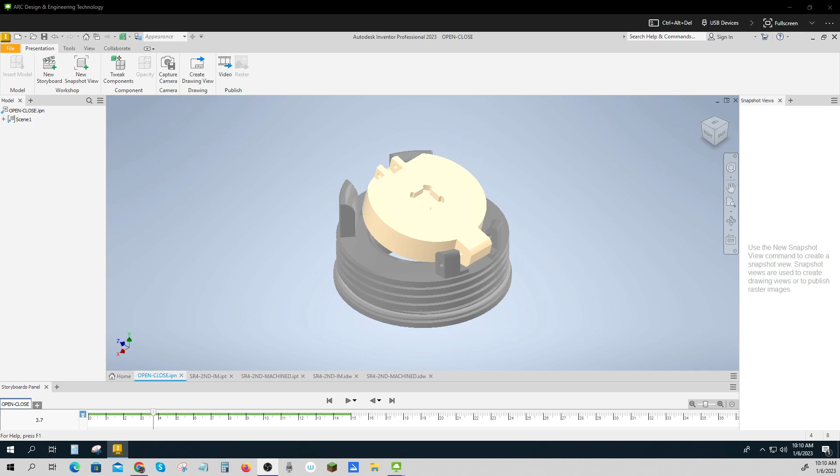Let's talk about the seat ring. That's this part of the check assembly. Remember, the check opens and closes, and the rubber part of the clapper comes and sits against this.

It turns out that this is a very critical part of the design. If it's too sharp, it cuts the rubber. If it's too wide, it doesn't seal well enough at low differential pressures with the spring. So this was very, very critical that we get this part right.

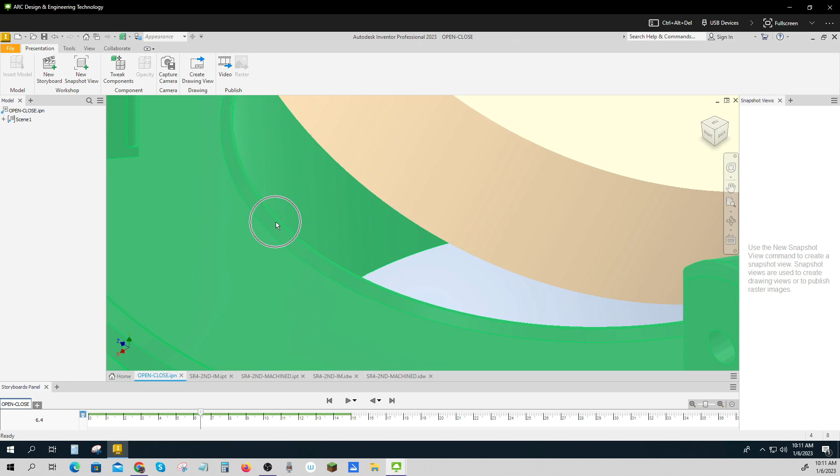So that's an important part of the design and how it relates to the height of the rubber, the EPDM, on the clapper.

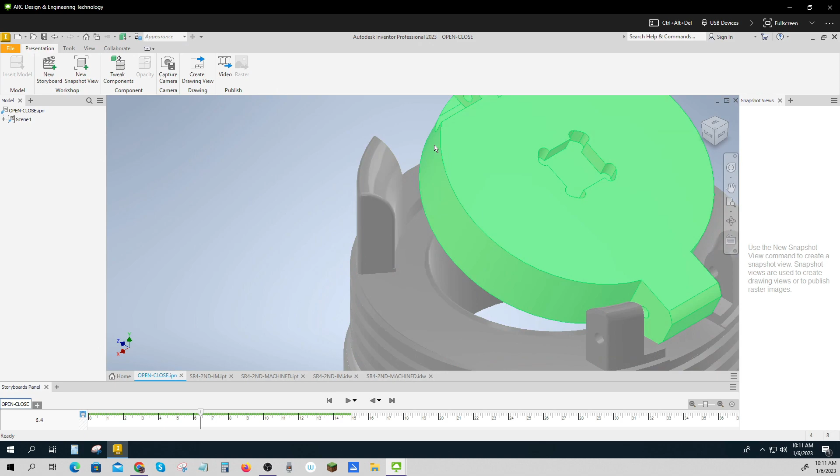So that's part of it, and it's got a special thread. You'll note when we get to that part, there's a special thread, and then there's these pockets that hold the spring and hold the clapper itself. And there's parts that you don't see. There's spacers and rods and shims and springs and cam bars and rollers and things like that.

But for the seat ring itself, what you're going to need to know is that the seat right here, that's an important area.

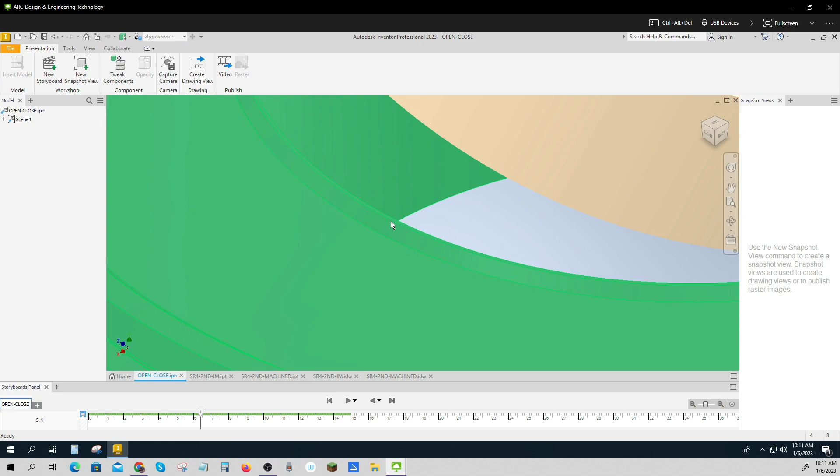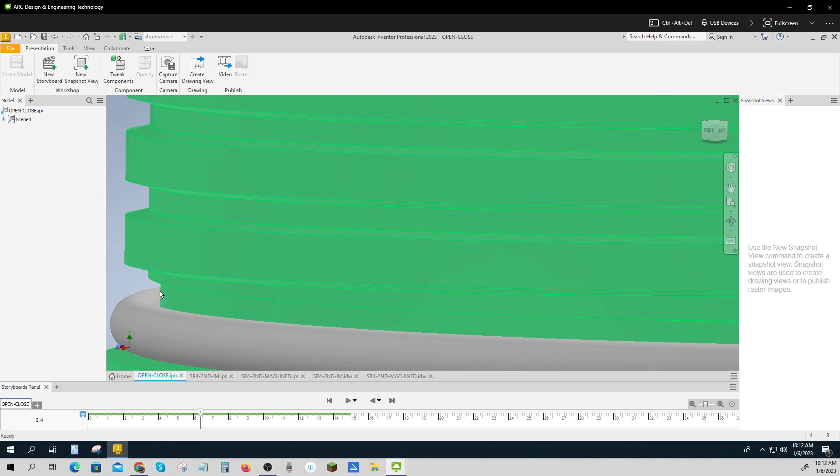The thread is important. Oh, and there's an O-ring, right? And so the O-ring has to sit. Let's see if I can get that to show a little bit better. The O-ring has to sit on this surface, and that's a modified O-ring groove.

Just because of the nature of this, it's modified just a little bit to fit slightly different, and that was due to the machining of the mating part and how that worked.

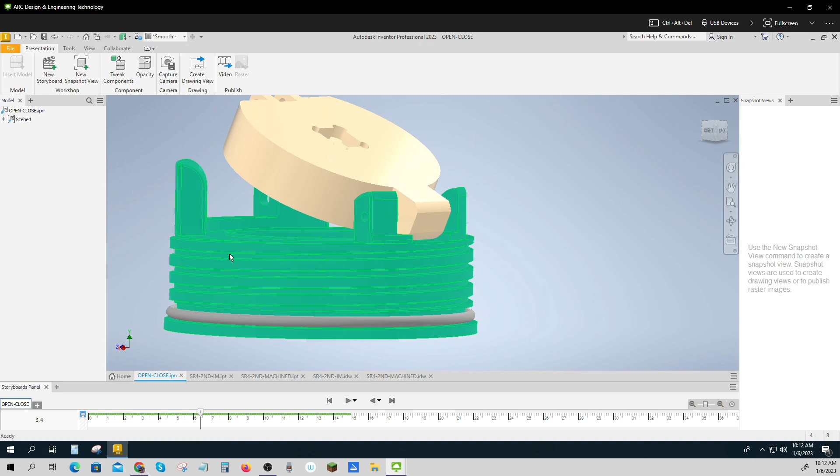Okay, and so again, we're going to make this from a blank. This is going to be an injection molded blank that then we're going to put on a machine tool and put all these fancy parts in it. And that's because all the tolerances are too close.

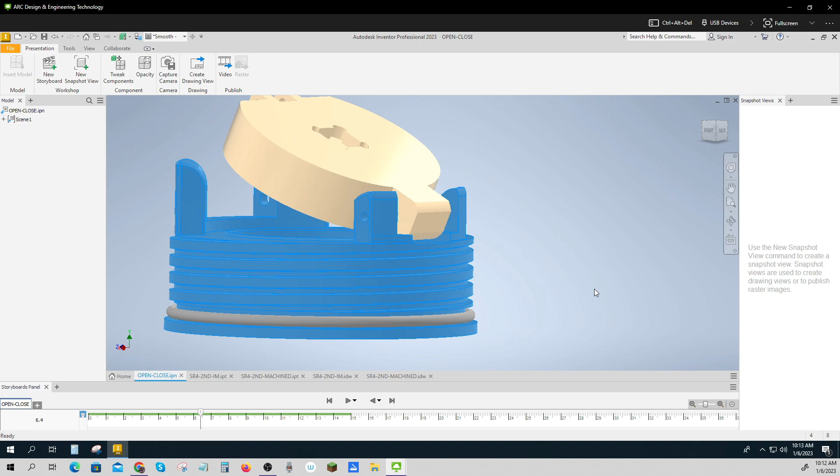Now, you should know that I've left a lot of features out that are just holes and lightening features. And that's because when you mold a part like this, injection mold it, where you have a large mass and then a small mass, these things end up getting what are called internal stresses, and they bend and they warp and they move all over the place.

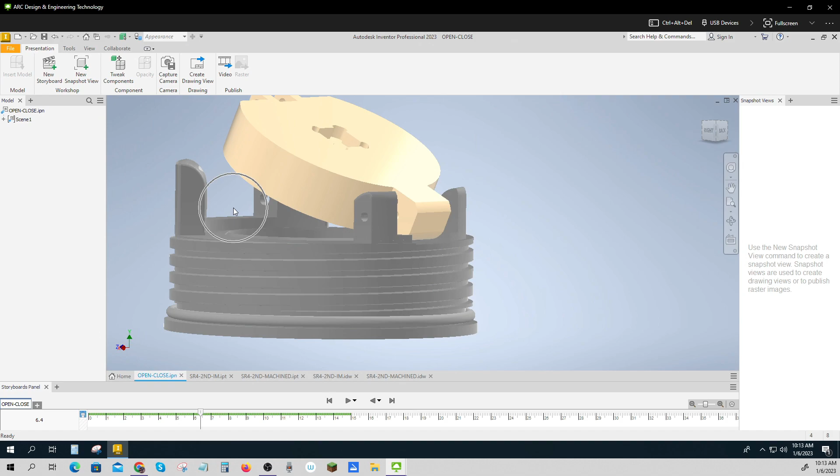So we've made it as a large mass that we then come back and machine to the proper dimensions. So let's take a look at that part. This is what the part looks like that we're going to get from our injection molding group. And you can see that there's extra material that we can then machine that fancy seat into.

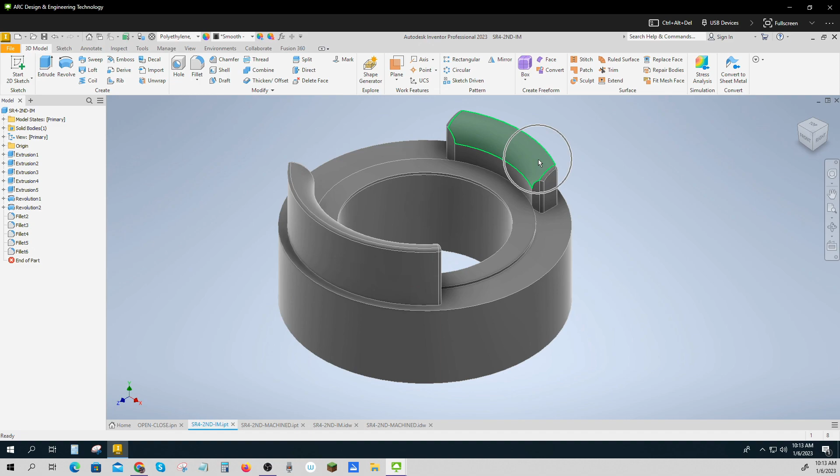There's extra material that we can machine a pocket into. Another pocket. And extra material that we can machine the O-ring groove and the thread.

Okay, so you'll want to make an injection molding drawing for this, like this, and we'll come back and talk about it later. It's not too complex of a drawing.

But then what you're going to want to do is take this and make a copy and create this from it. And you can see it's just adding some extrusions.

Let's see, there's an extrusion that we added. There's another extrusion that was added. There's another extrusion. So it's just taking material away from those.

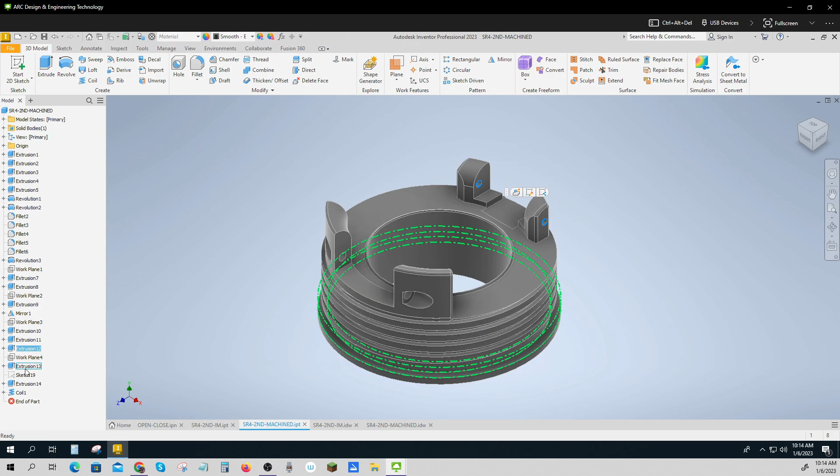And you'll get a video on how to do that. And so then there's the extrusion for the O-ring groove, the extrusion for the major diameter of the threads, and there's the coil itself.

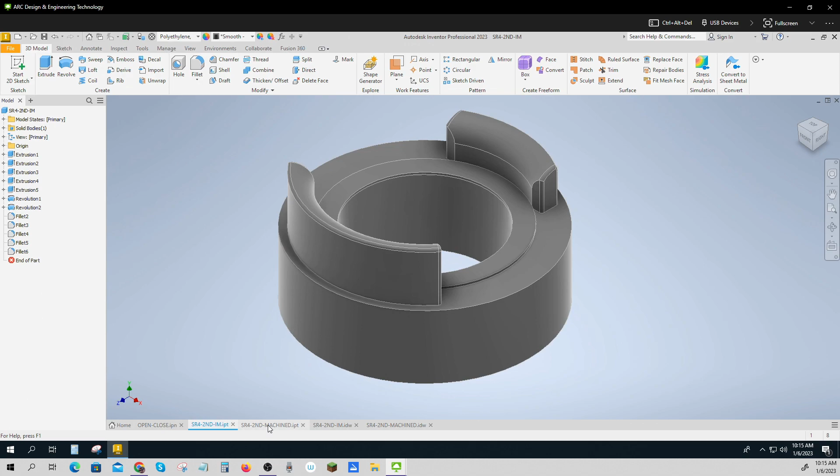We'll go over all of those in lab of how to do those. So you're going to start with a blank and then machine it to the close dimensions that are needed.

So let's take a look at the drawings again. As with every mechanical drawing, there's your main workspace. There are revision notes. There is a title block.

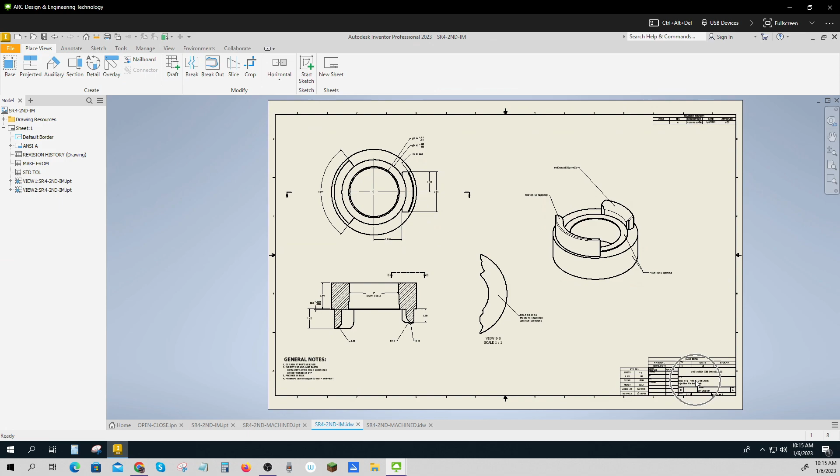On the title block, you'll see the title, the company, the drawing number, and how many sheets there are. Since this is D size, we got everything to fit on one sheet. This is the primary scale, so if a view doesn't list its own scale, this is the scale you're going to see.

In the title in general, I give the long description of the part and what part of the process this drawing is for. So this is the seat ring for a 4-inch valve. It's the second check assembly, and this is the injection molded blank.

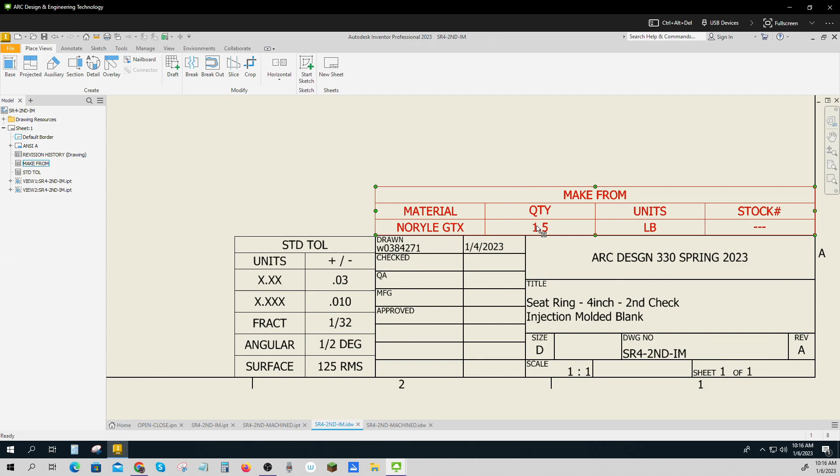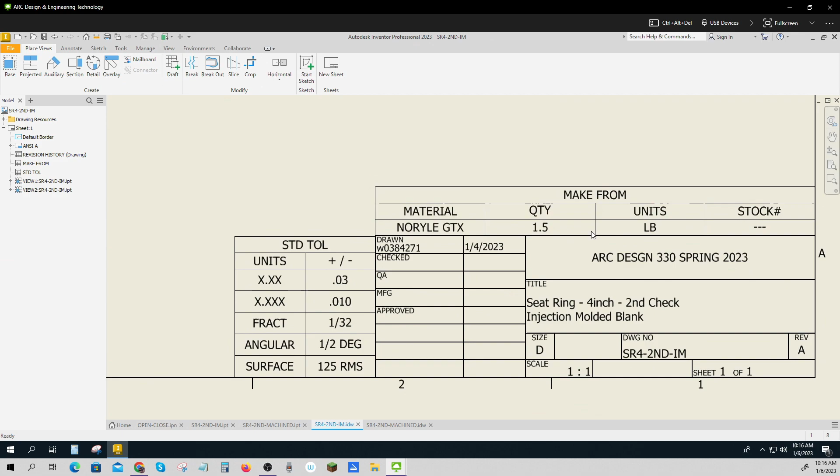Then we've got the 'make from' - this is something called Noryl GTX, which we talked about with the clapper. It's an automotive plastic, I think it's called phenylene. It's very strong, very stable, and we use 1.5 pounds of it in that blank. There's no stock number for that because we don't stock it - our vendor, the people making it and the people we order from, will stock it for us. We just want to let them know what to expect.

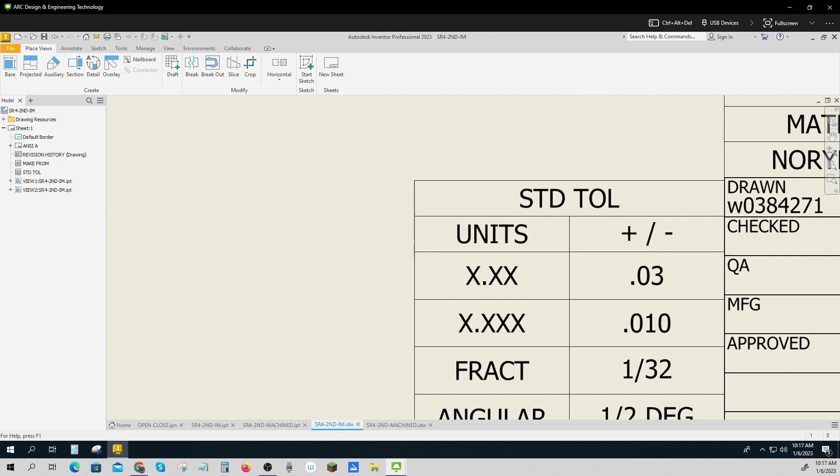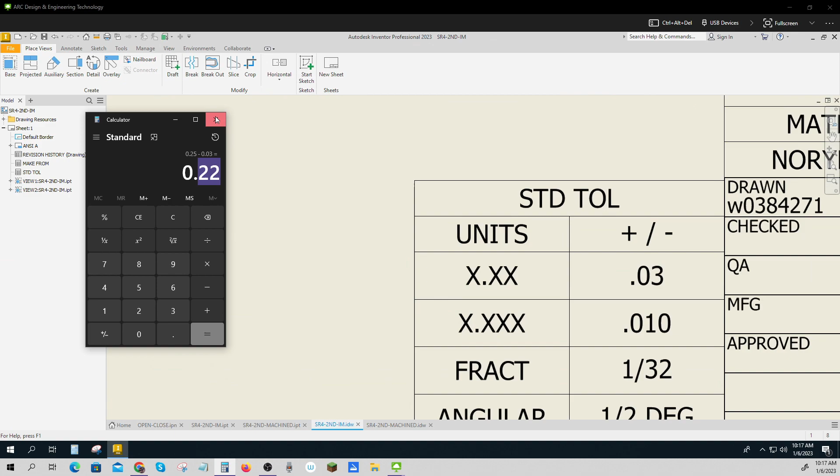Here's our standard tolerances. Remember, if a dimension doesn't have a tolerance listed on it - like this radius of 0.25 - we have to go back and note it's held to 2 decimal places, so that's going to be 0.25 plus 0.03, or 0.25 minus 0.03. Anywhere between 0.22 and 0.28, when I go about measuring that, will be acceptable.

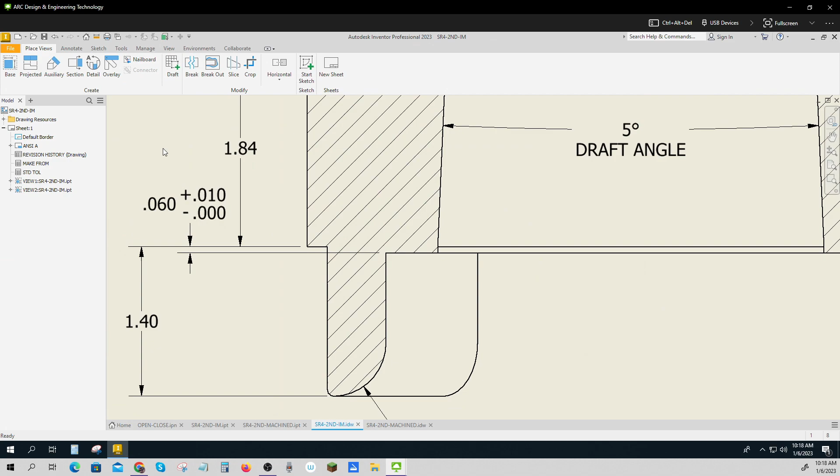So all of these, most of these, since it's a blank, have large tolerances, except for this one, which is 0.06 plus 0.01 or minus 0.000. That's off of the original drawing, and I'm not really too sure why that's being held so closely. Even though this was my part, I inherited a lot of this drawing, and I really don't think it needs to be that tight.

This is called the draft angle. That's so that they can pull this off of the core easily. It's also good for the water flow.

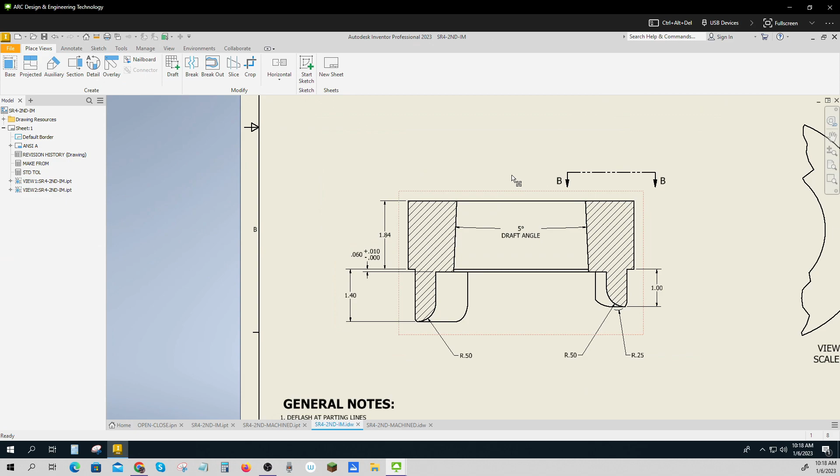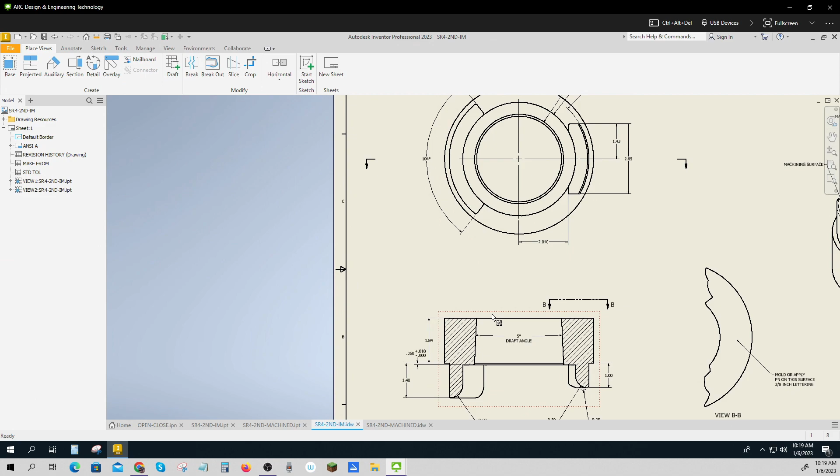So that's what we see, and this is a section view. Remember, when this was put in, this was my base view, and then I made a section view and put it down here. The reason the section view doesn't have letters on it is because it's an orthographic view adjacent to the primary view, so you don't need letters on this - it's an understood view per ANSI standards.

Now this one does need a view because I don't see where it is - that's just to show a little piece of this bottom so that we can apply a note, putting the lettering right there.

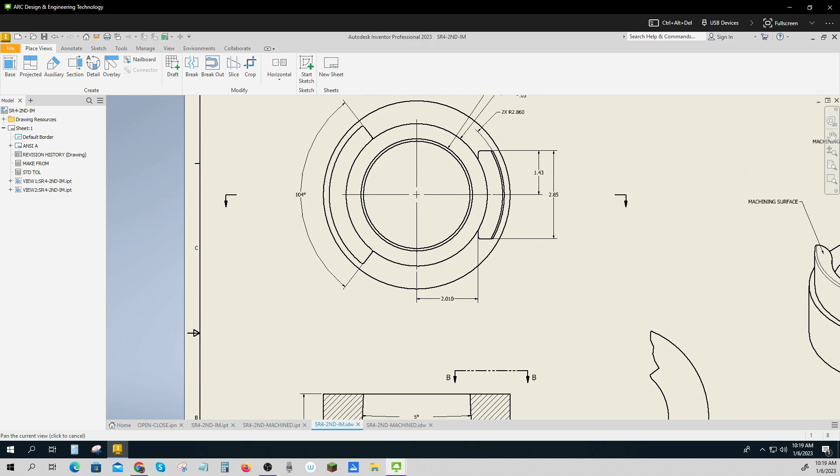Now some of the rest of this, again, I really don't think needs to be 3 decimal places, but it's listed that way on the original drawing, so I put it on there. Notice these ones are not that way - they're much, much larger.

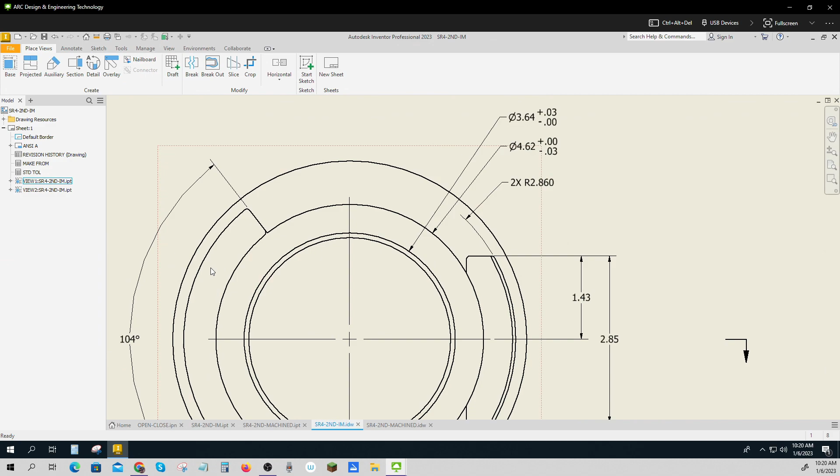Now these dimensions can be held with injection molding. If these ones get too big, they won't fit, so these can be inside a little bit by 0.03, and this one can be outside a little bit by 0.03. So that's the basis of this.

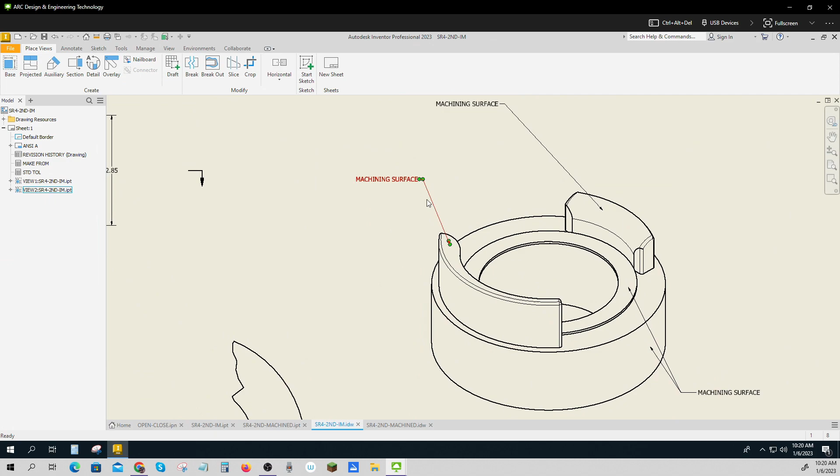Now you'll notice that you get this model - I've got this model for you - and you just have to figure out how to dimension it kind of like this. I put in a view so that we can make it clear which are going to be machine surfaces for the mold designer. So that's the basics of this.

And then deflash at parting lines - injection molds always come in two pieces, then the mold pulls apart and you can get your part out. That always leaves a little bit of flash, a little rim, so this tells them they have to actually go about and deflash it before they give it to us. There are lots of ways to do that.

We leave that up to the vendor to do. We also give them an inspection priority for the first and last parts of any one run. And the dimensions apply after mold shrinkage - this is hot plastic when it goes in, and as it cools, it gets smaller.

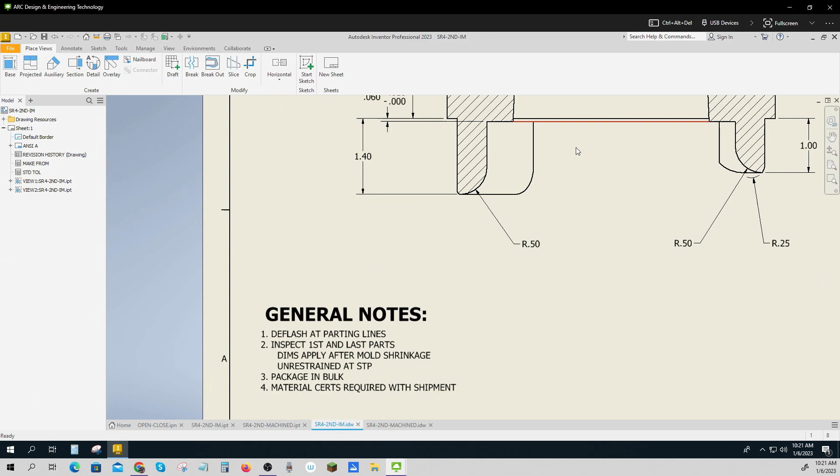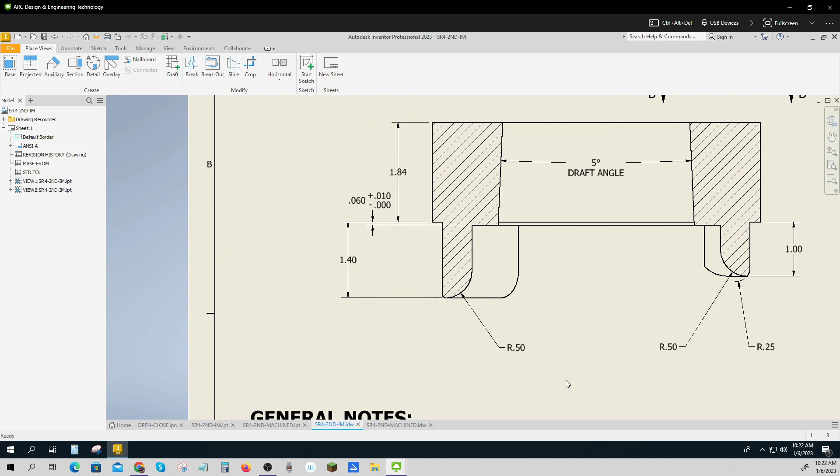We want to make sure the vendor knows these are not the mold dimensions. These are the dimensions of the part after it has shrunk and unrestrained. They don't get to clamp it down flat or anything like that.

STP is standard temperature and pressure, and that's an inspection term. I don't remember exactly what it is - I think it's 68 degrees Fahrenheit at, I don't know, 1 atmosphere pressure, something like that. I don't really remember all those details. I let the inspectors remember it.

They'll take two parts, the first and the last part of a run, into the inspection shop and let it sit for a day or 4 or 5 hours to come to temperature and pressure, and then they'll inspect the parts. We get to package it in bulk - they don't have to package them separately.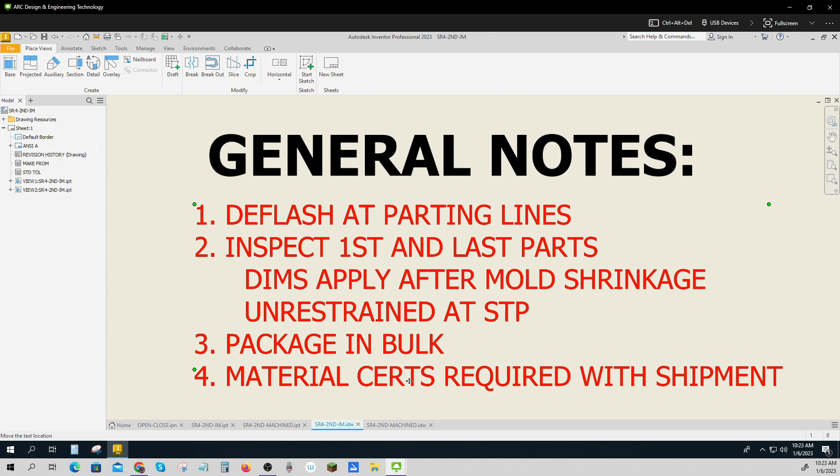And then material certifications are required. So the certification that this was made out of Noryl GTX injection mold plastic would be required to come with the parts.

Okay, so there we go. That's our review of the blank, or the injection mold part.

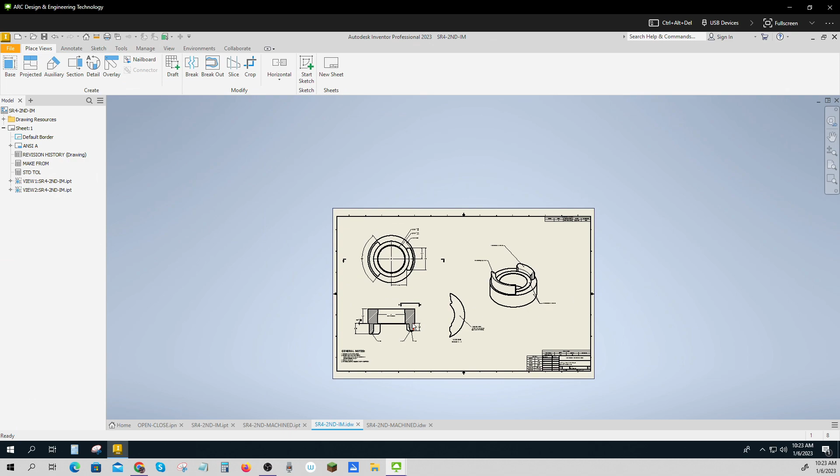Let's take a look at the machine part. Now this is a fairly complex drawing because lots of stuff is happening all over the place. Here are my two primary views. I'm not dimensioning much on these, but these just let me know where things are and about how big it is. Now, this dimension here comes from the molded part.

So it's in the reference brackets, the reference parentheses. But then I need to make the diameter for the O-ring, and this is what it is. Normally O-rings have different tolerances on it, so that's why this is modified. But this is what works in this part, and that is the O-ring groove dimension.

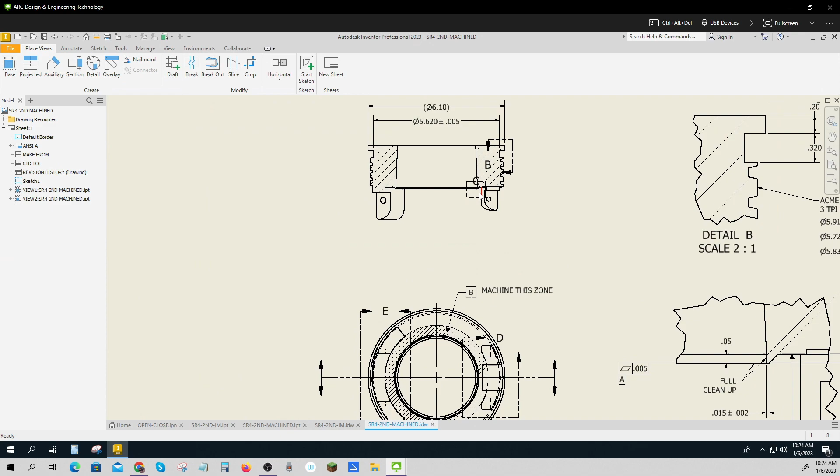This detail says, okay, I'm going to tell you about all this stuff in detail B. I'm going to tell you about all of this stuff over here in detail C, because this is just too small - I can't get everything in there. I'm going to machine this zone, okay, I'm going to machine that entire zone, and detail D is where I'm going to find out about that.

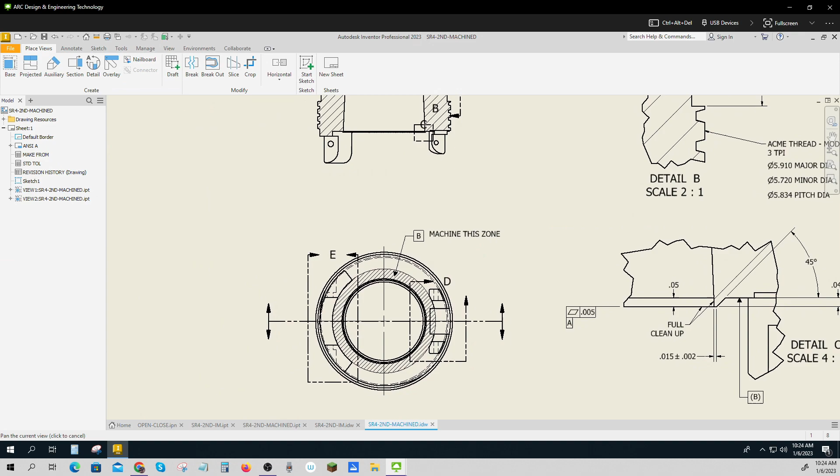So let's look at my detail D. Here it is - this is my detail D that tells me about this pocket that I'm machining. And then I had to make an alternate view over here. As I look at it, I prefer not to show the entire line. Okay, and so here it is. This tells me the top view, this tells me the other view.

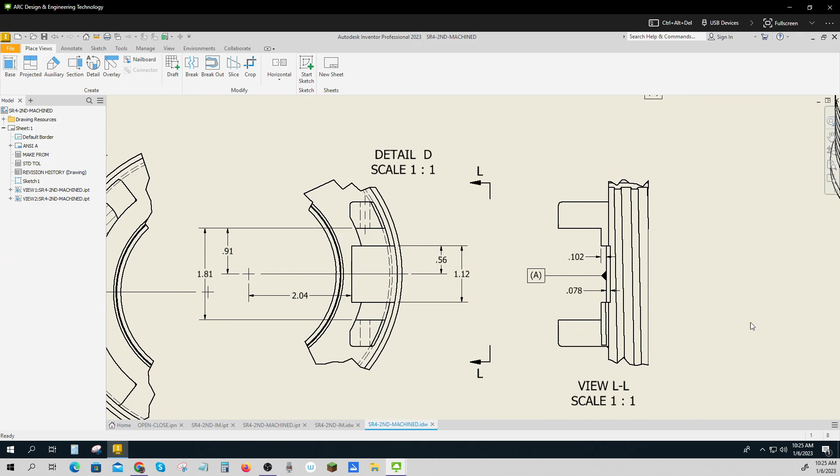I'll talk about the datums in a little bit. Okay, but what happens - well, I'll talk about it now. What happens is everything is relative to this seat. That's the key important part, which I told you about.

And so after that's machined, what's called full cleanup - they're going to do a full cleanup and then they're going to machine it down 0.048 inches at a 45-degree angle. And this surface, after it's been cleaned up, now becomes A. It's flat within 5 thousandths of an inch. Quite frankly, you can hold that much closer with a mill - you could easily hold 1 or 2 thousandths of an inch flat. So that becomes my key important point.

And then this becomes my next important point, so that dimension there. I'm not too concerned about the dimension itself - it can be plus or minus 10 thousandths of an inch, but I need it to be parallel to this. I need it to be parallel within 5 thousandths of an inch, okay, otherwise it doesn't seal properly. And I can get too much of a cut when this goes on and off and on and off.

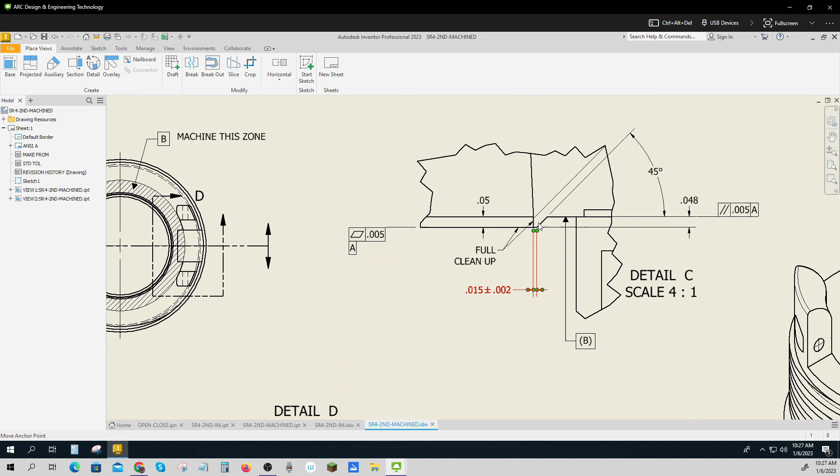Okay, and it's got to be parallel to A. And then I just want a nice clean bore right here that's straight, and you'll machine that also. So that tells you a lot, right? This one is really important. And then we've got the same thing on the other side.

It's the same thing on the other side where I've got, and I'm not going to show my entire line. So here again, I've got a cutout, which I show right here. There's my cutout, and the cutout goes to 0.172 above the seat. So it's just a rectangular cutout.

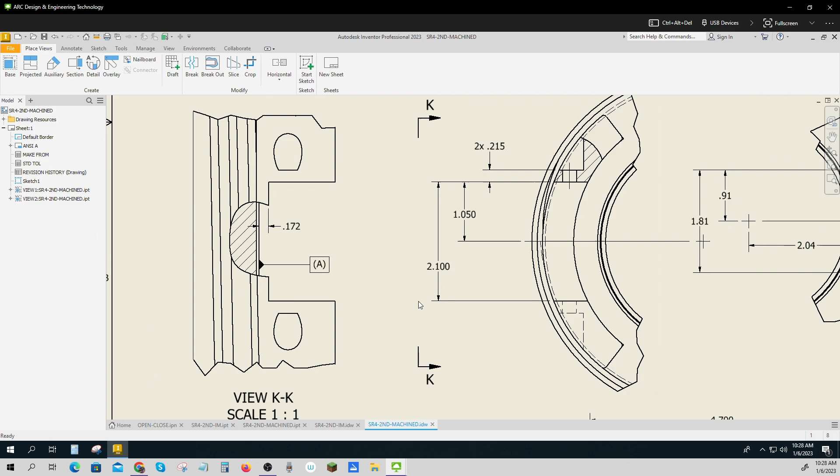But then I've got these two little counterbores. This is a counterbore, see what that is there, is this right here. I have to put that hole through there, and then I have to put the counterbore in. Let's see where I talked about the counterbore.

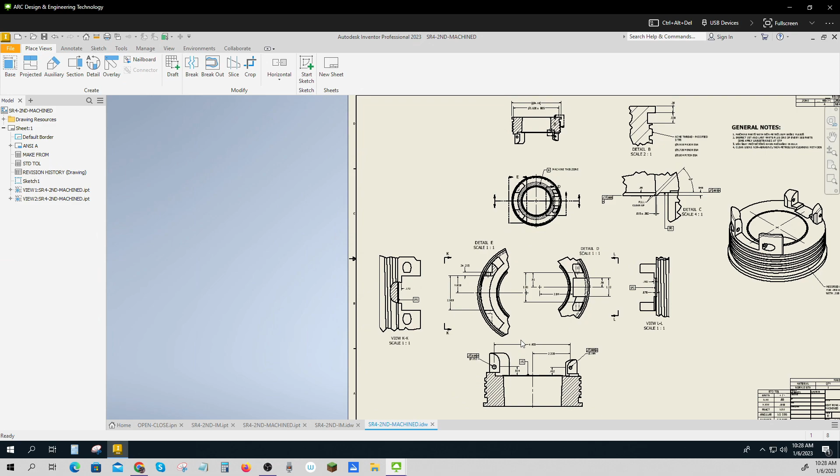Thought I had the counterbore in here somewhere, and now I'm not seeing it. So I'm going to have to add a view for you. It's amazing when I miss a drawing. I don't have to add a view, I just have to add my counterbore callout right here.

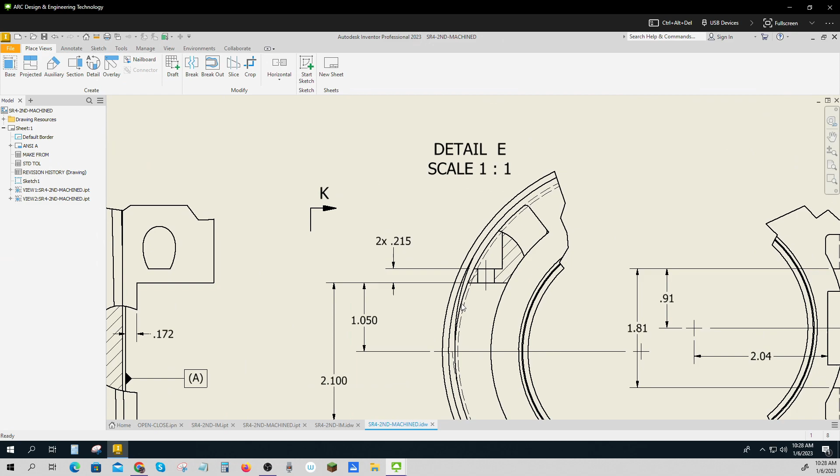Okay, so I'm going to counterbore to a depth. Whatever I've made here, I'm going to counterbore it so that I have 0.215 thickness right there, on either side, and that's called a breakout. That's why I did that. There's a breakout so that I can do it — I don't have to do it to a hidden line.

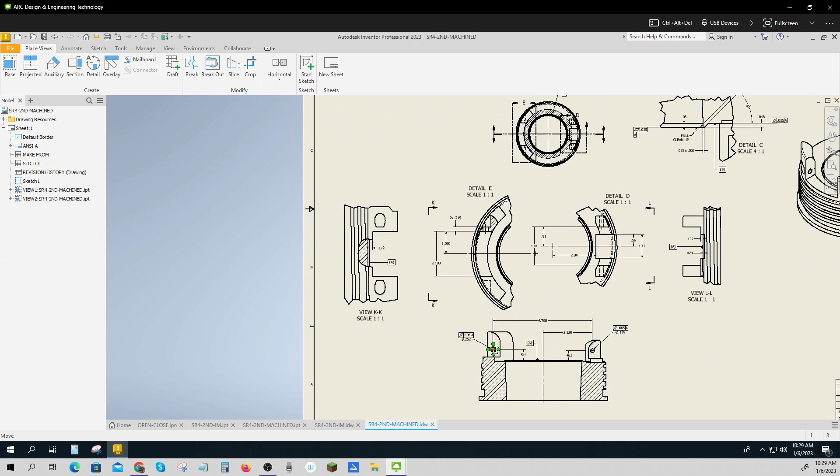Okay, so there we go. I've got those, but I could actually call it out here. I could call it out a backside spot face or a backside counterbore, but I think I'll call it out right here, so you'll see that when we get to it. I'll do it probably as a leader text, as I call that one out.

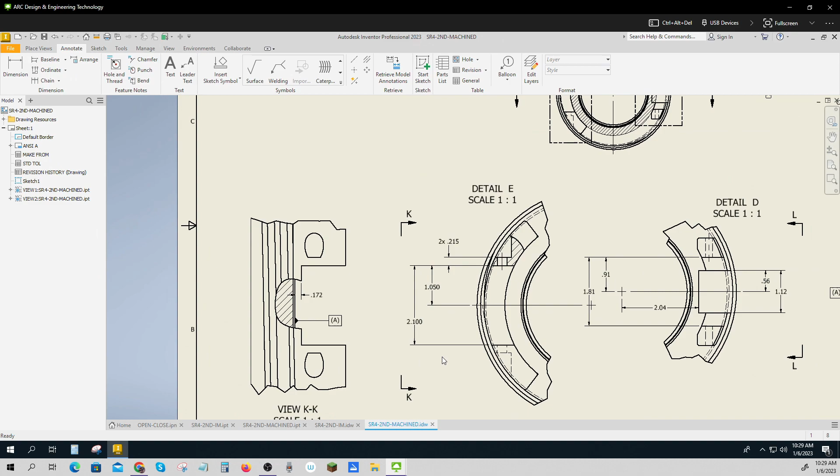And so I do the same thing over on this side, right? I have to call out this hole right here, and I've got the dimensions, and notice how tricky these are. Oops, this one needs a tolerance. As I'm looking through here, I'm seeing things I have to change. This one is a very close tolerance.

And it's a deviation, so I can be a little bit more. So that means now I need to move that. There we go, so got those ones. So those are very critical. These ones need to be fixed too. So I'll go ahead — that one's okay, this one is extremely critical.

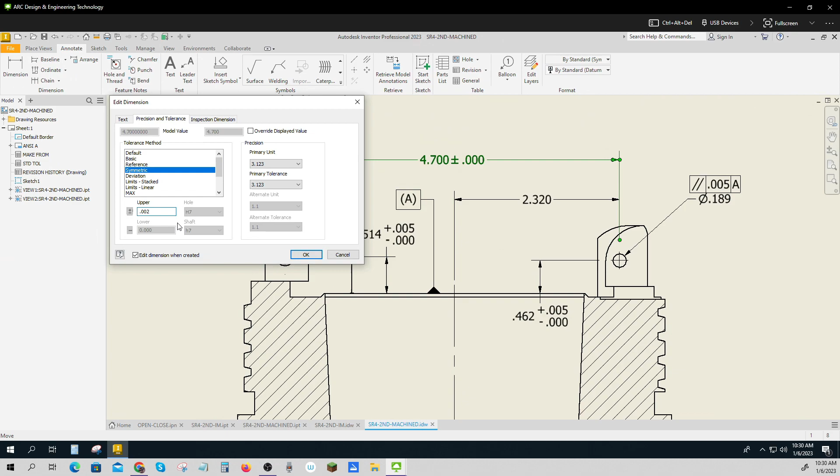So you can see as I go through these, sometimes I don't catch everything on my first time through when I do it, but you'll have those on your version of this to be able to do. So what's critical is not so much exactly how it's centered up over this seat because I've got a little bit of room, but this dimension between here and here and these two dimensions are very, very critical as we go. Okay, is there anything else?

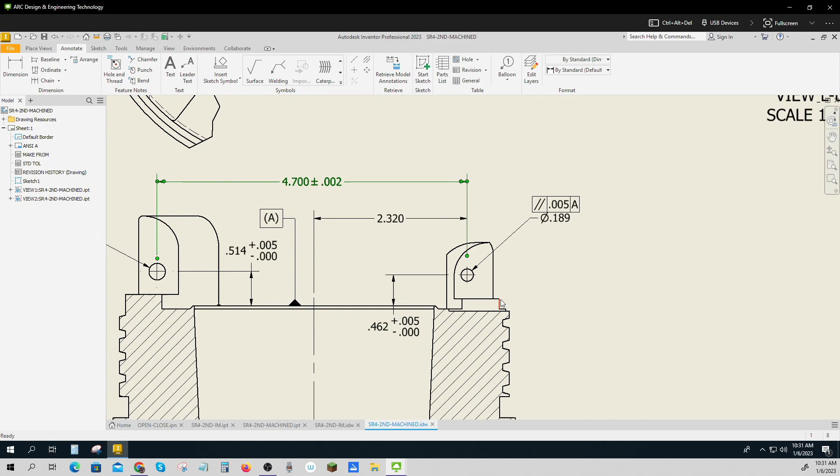Now this is interesting. So as I run, this is my surface A. This has to be parallel because if it's not, you can imagine if this pin is really out of parallel, then it won't seat properly here on one side of that big clapper and it will on the other. I'll try to get you a visualization of that. It's hard to do, but I'll see if before lab I can create a visualization to show you just how badly it affects the seal.

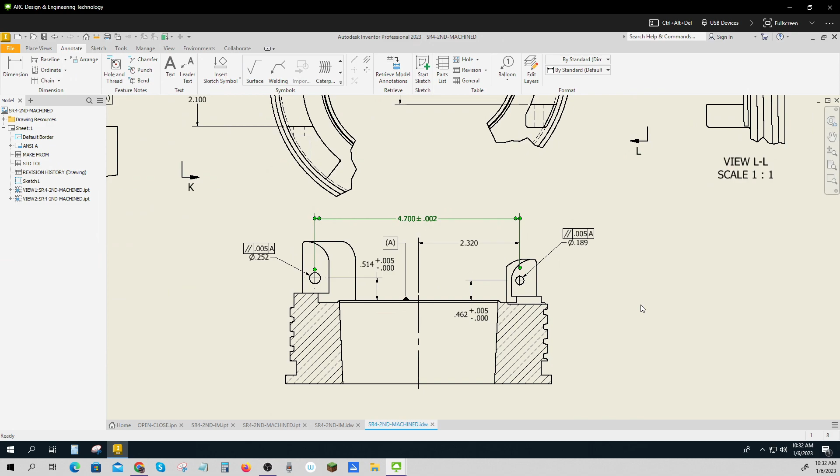This hole has to really be parallel to that. So when we built this, we actually built a fixture that's set up on this, and we pushed this against the fixture and then drilled these holes so that we were absolutely certain they were parallel. We actually did much better than 0.005 — we were usually getting 2 or 3 thousandths, and that was basically just tool wander. Tools can wander a little bit. If you think about a drill coming all the way down here, this small of a drill over that length is pretty hard to do.

So we had what was called a drill guide that was part of that fixture that sat in between here. It would drill through here, and the drill guide would support that long drill bit all the way through here, and then do this last part.

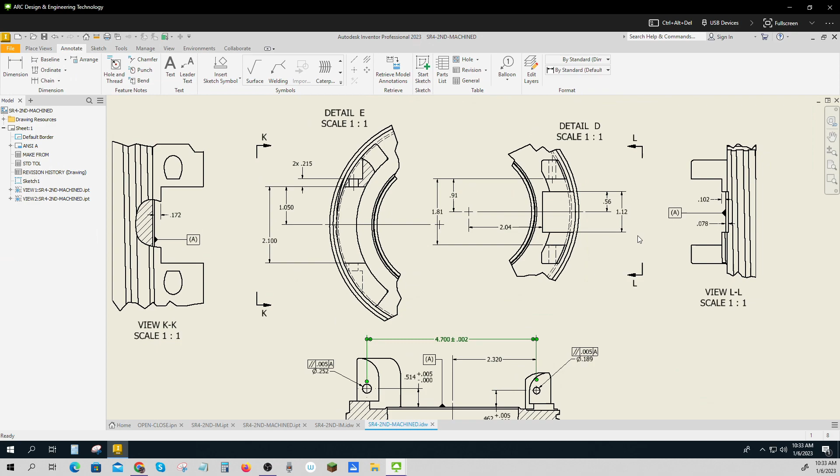So there's lots to machining. You can't just give somebody a drawing and know it's going to work. Somebody's got to figure out how to do it. This was about a year's worth of work for us to figure out how to reliably make this part so that it would always work.

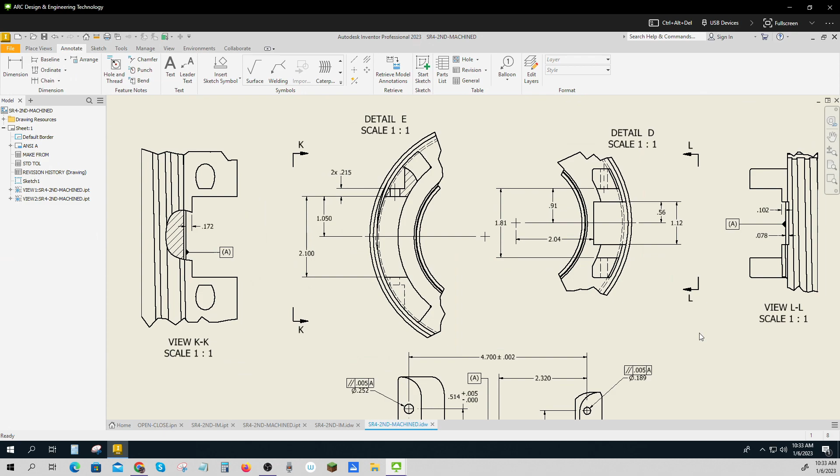Okay, and so I see a few little things here that could still be cleaned up. This could definitely be brought into here so that this comes into here. When you see the final version of this, I've simplified this drawing since the last time I made it, which is why I don't already have it drawn all the way for you.

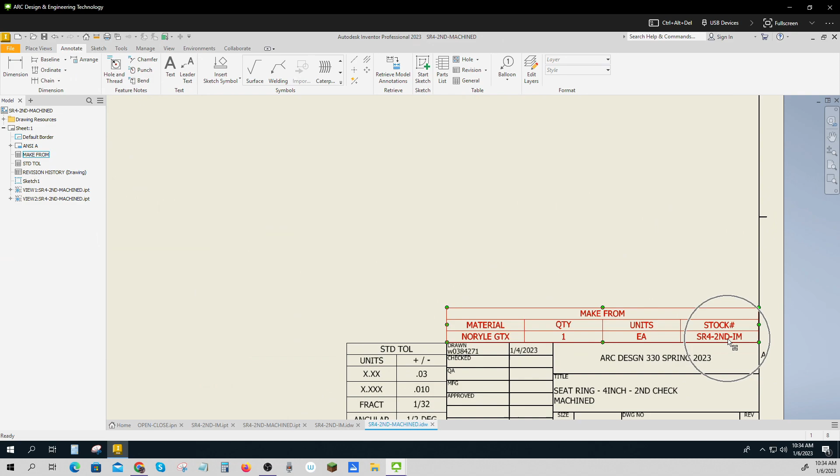But here we go again. We've got our title block, our make from. Let's see what we're making it from. It's made from Noryl GTX. And in this case, we're going to go grab one of those blanks. So this lets the machinist know, go grab that blank right there.

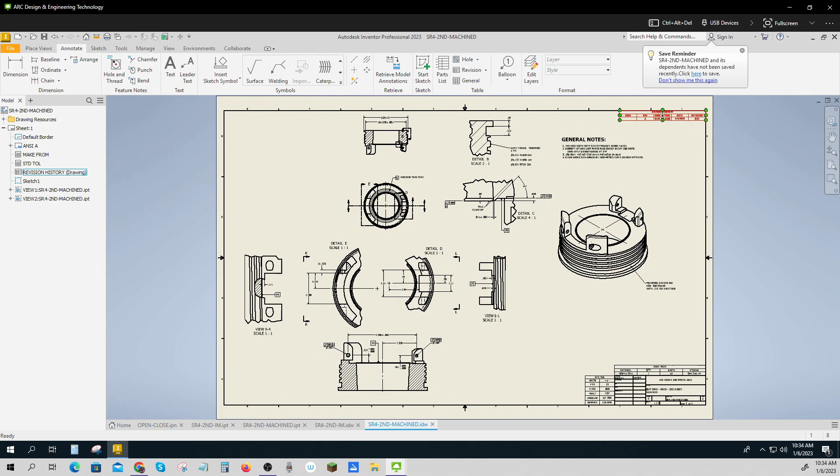And set it up. There would normally be manufacturing notes on here about the fixture and all that. We're not getting that deep into it. But there's our standard tolerances, our revision block, and here's our notes.

Now, this one, we're making sure that they use non-petroleum-based fluids when they machine it. Petroleum would actually be okay on this, but often these are done on the same machines as other parts that require non-petroleum based fluids.

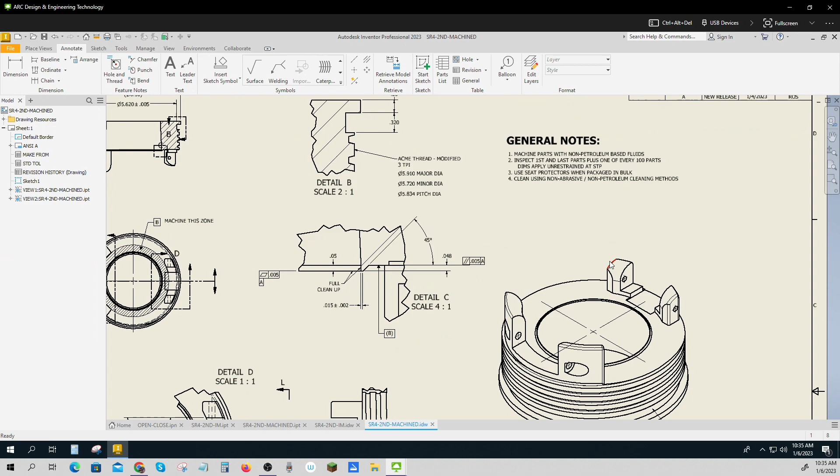And so we just call that out to make sure you don't cross-contaminate another part with cutting fluids for this part. Okay, inspect first and last parts, plus 1 out of every 100 parts. Again, dimensions apply

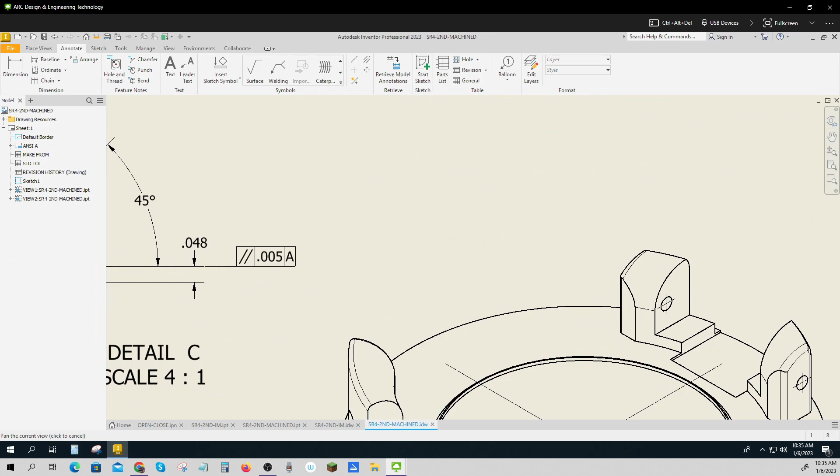unrestrained at STP. Now, when you package this thing, we can package it in bulk, but we're saying that this seat is rather delicate, so it needs some sort of a protector as you package it in bulk. And again, that will be up to the manufacturing engineer to do.

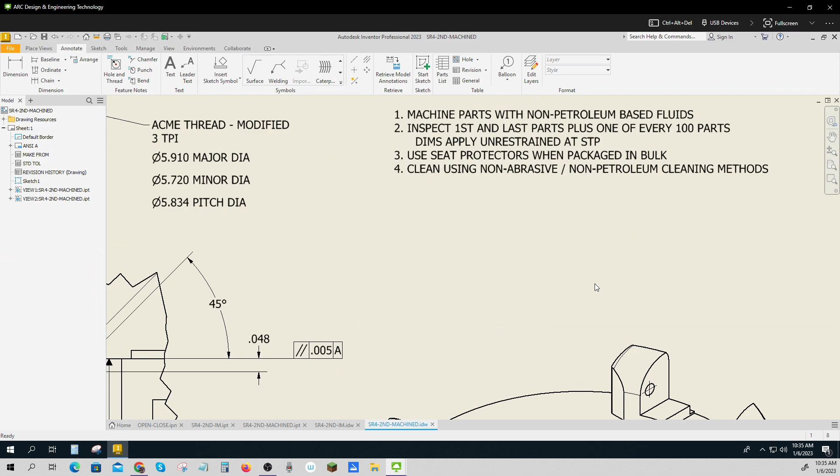And then again, non-abrasive, non-petroleum cleaning methods to get any cutting fluids and little pieces of gunk that are left on here, flashing, get it off. So there we go. There's all about the second check.

Again, you're going to machine this pocket, these holes. So you have to model this pocket and these holes. This pocket, this little extra pocket, and this hole, and this thread.

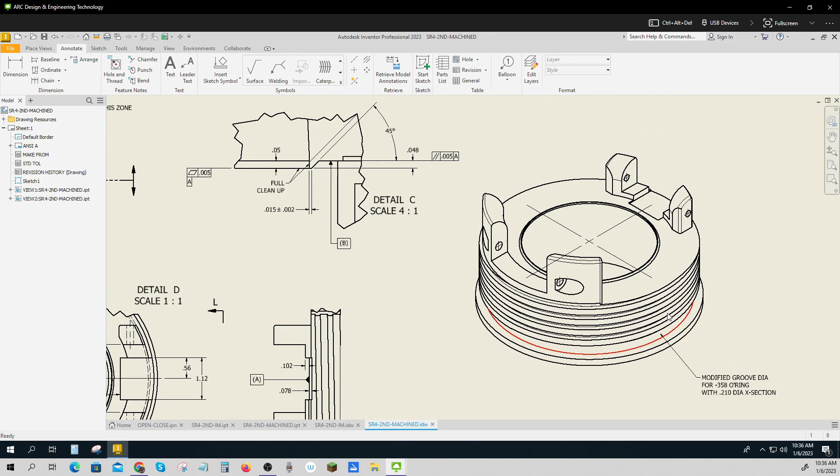Oh, let's take a look at the thread. Where have I called out the thread? Maybe I haven't done that. Oh, here it is over here.

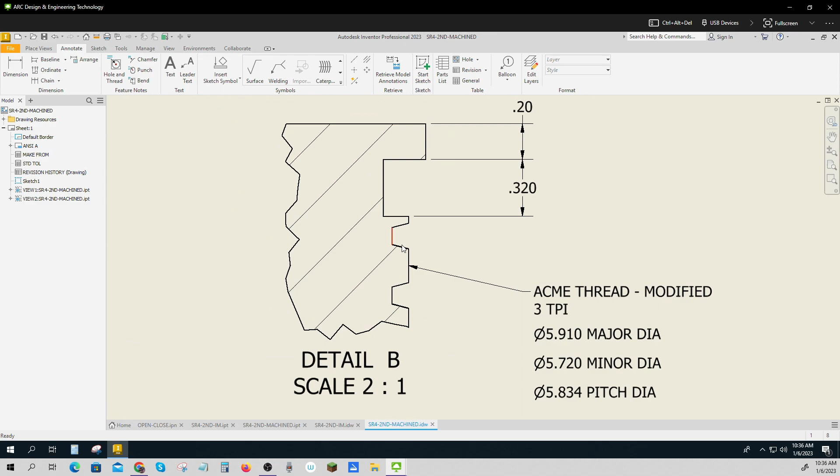So here's the O-ring groove. We've called out the diameter over there, and it's 0.32 wide. And there's this little rim. And then we've got this thread, and it's an Acme thread. That means it's got a very specific thread angle and a flat tip or flat root.

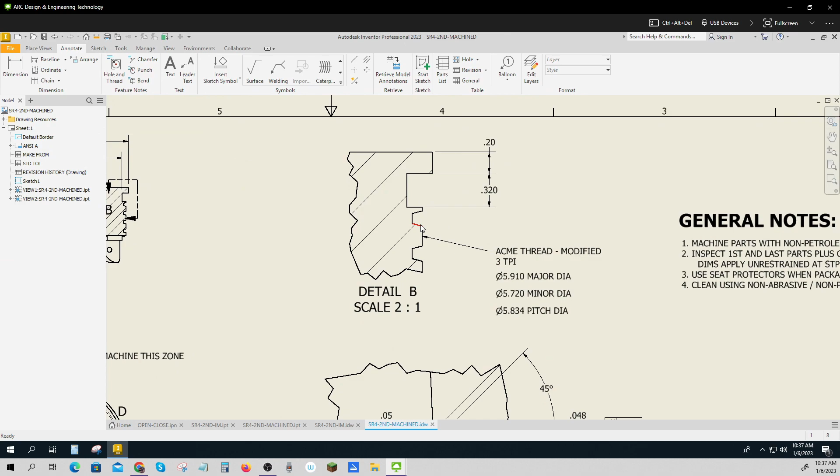And I'm not sure I've got this all the way right here. It looks like I've got a little problem with it with my model that I'll go back and check out at this part of it. I think most of it's okay. I might have a problem down on this one end of it.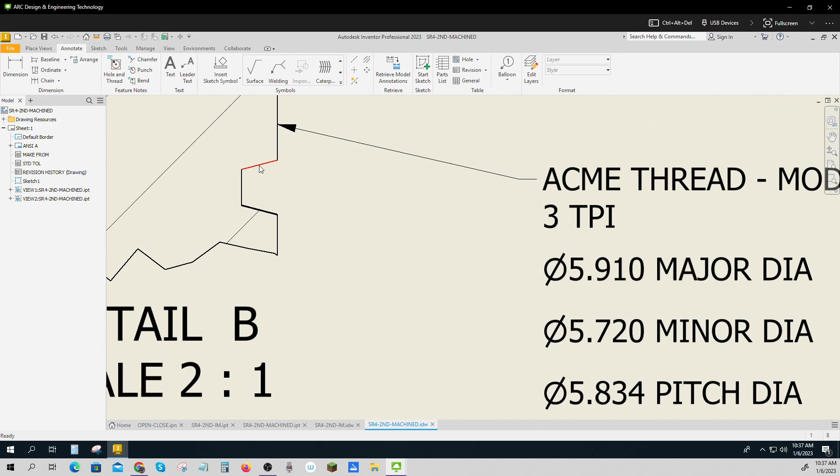But basically, it's got a major diameter, that's this outside. It's got a minor diameter, that's the root. And it's got a pitch diameter, that's sort of in between where, when you're doing calculations, that's where the calculations for forces happen. And 3 TPI, 3 threads per inch, so it should be 0.333 from this point to the same common point.

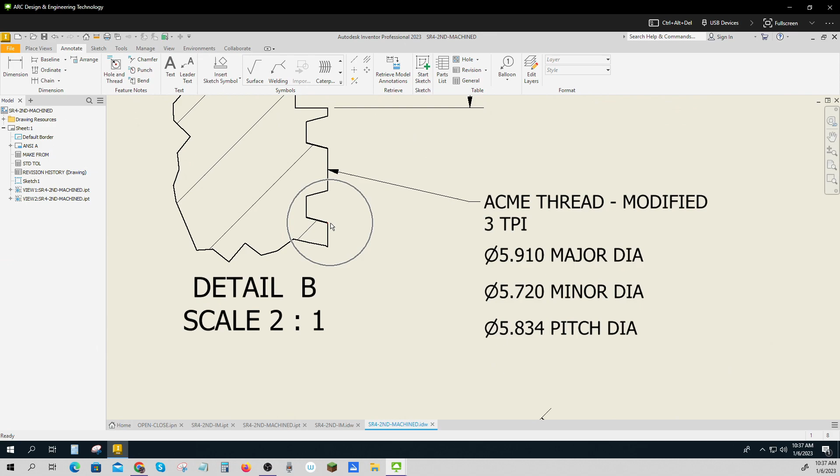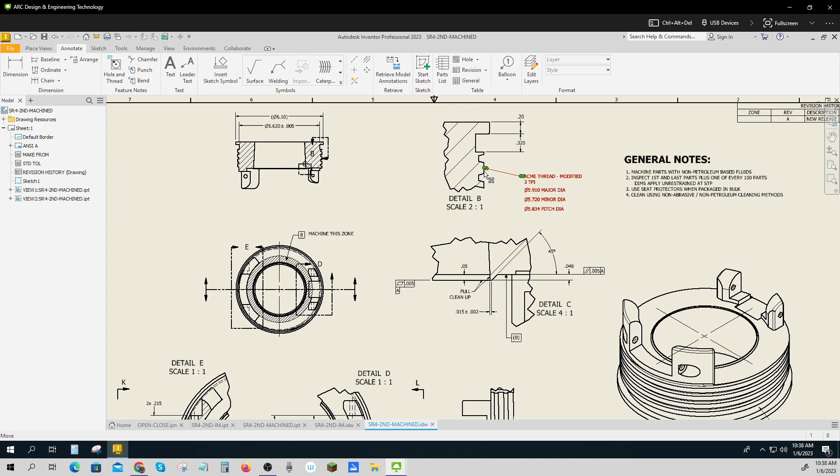Okay? And so I'll show you in lab how to actually create that model of what you have to do to be able to do that. Okay? And there's a couple of different ways. You can either take it down to the root diameter and add material in, or you can take it to the major diameter and subtract material. Okay, so there we go.